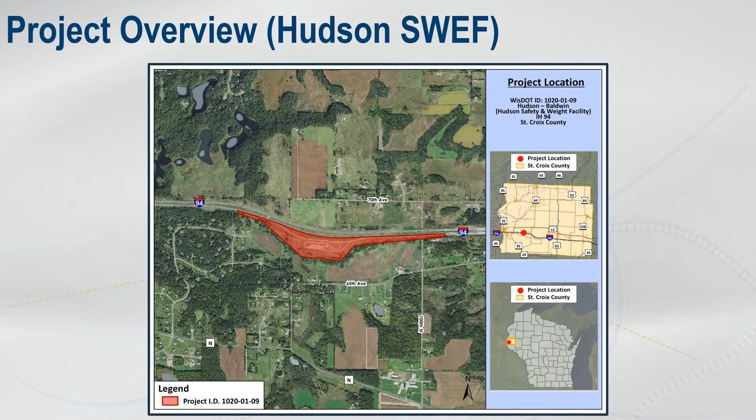The Hudson SWEF project is located between mile markers 7 and 8 along eastbound Interstate 94 in St. Croix County between Hudson and Baldwin. The Menomonie SWEF project is located between mile marker 48 and 49 along westbound Interstate 94 in Dunn County between Menomonie and Eau Claire.

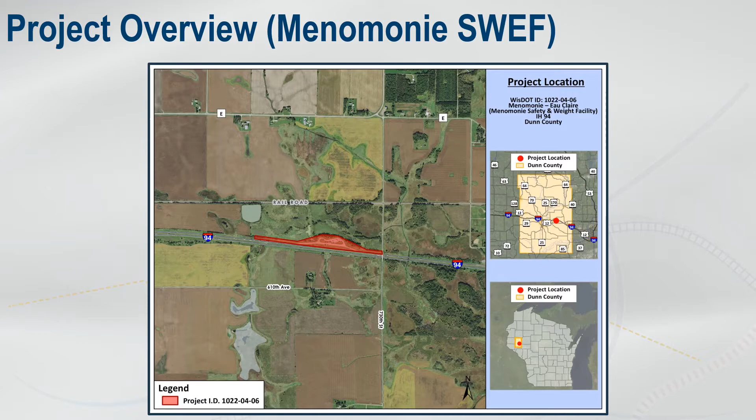The second objective is to confirm both the operator and carrier are complying with necessary laws and regulations. This ranges from checking to see if the vehicles have up-to-date registration and insurance, reviewing operators' logbooks to ensure that they are getting the proper amount of rest, and watching shipments for illegal substances.

Lastly, they monitor the overall weight and weight distribution of vehicles' loads in order to protect the state's roadways and bridges. It is currently estimated that overweight or improperly loaded vehicles cause approximately $35 million in damage each year to Wisconsin roadways, so it is important that the Wisconsin State Patrol be able to continue efforts to reduce the damage to the state's infrastructure. If you are interested in learning more about this important WisDOT program, please take a moment to watch the SWEF inspection video linked to this project's website.

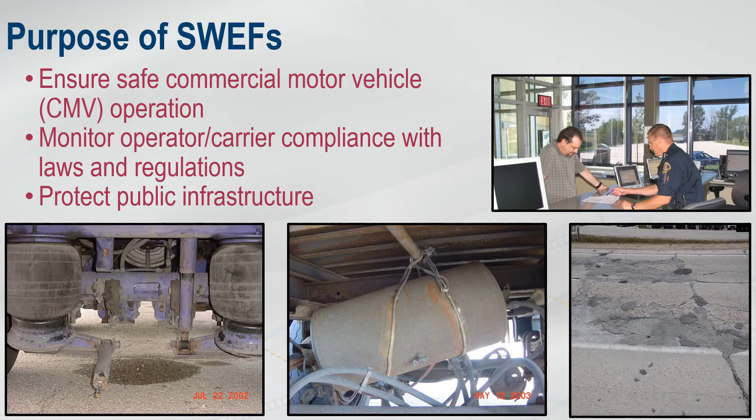The aim of the Hudson SWEF project is to replace the deteriorating facilities and infrastructure. The Hudson SWEF was constructed in 1993 and has reached the end of its useful life. The existing site lacks sufficient storage for inspectors' equipment and has a crowded building in addition to having poor sight lines to the adjacent interstate. The existing facilities equipment, such as site lighting, water well, static scale, and weigh-in-motion system, also is outdated and in need of replacement.

The project will also improve the site efficiency for CMV operations. The current site requires commercial motor vehicles to weave and loop their way through the entire site in order to be inspected before exiting the SWEF and continuing with their trip. The proposed site will allow Wisconsin State Patrol to determine, while the vehicle is on the static scale, whether they will pull the vehicle around into the site for a detailed inspection or allow it to return onto Interstate 94.

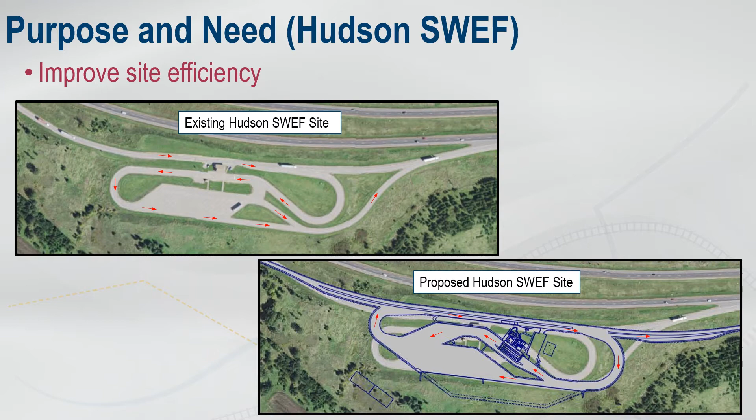In addition, the existing static scale is a single-deck scale, which requires 3 separate weighing operations to determine the overall weight of a commercial motor vehicle. The new static scale will be a triple-deck scale, allowing the Wisconsin State Patrol to weigh a typical truck in one operation, saving time for both the State Patrol and the CMV industry.

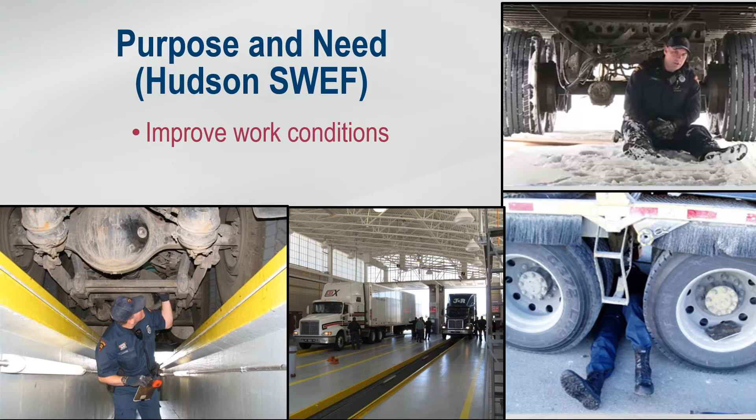The new building will provide dual indoor garage bays where commercial vehicles will be parked to perform a vehicle inspection. The inspection bays also will have underground pits, as can be seen in the left 2 pictures. These conditions will allow for more efficient and safer inspections by giving inspectors better physical and visual access to commercial motor vehicles.

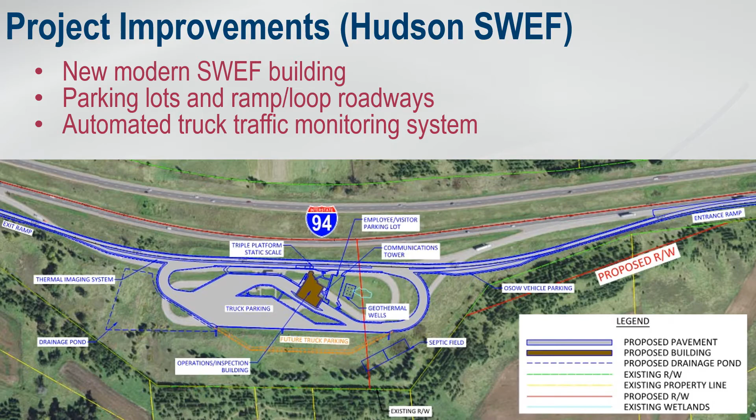The Hudson SWEF improvements will include a completely reconstructed site, including a new modern-day SWEF building, parking lots and ramp/loop roadways, and an automated truck traffic monitoring system along eastbound I-94. The new site layout will also provide additional commercial motor vehicle parking and the option to expand further in the future as the demand for truck parking continues to grow.

The new modern Hudson SWEF building will include spaces for both Wisconsin State Patrol operations and inspections. The operations space will include a location for observing the static scale in the adjacent I-94 roadway, driver contact area with counter, office spaces and conference rooms for troopers and inspectors, various storage functions, and a public lobby with access to public bathrooms. The inspection space will consist of 2 garage bays with underground inspection pits.

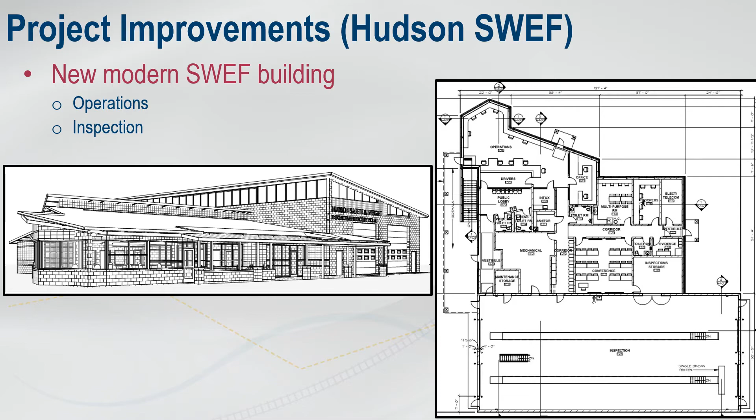The Hudson SWEF project will include an automated truck traffic monitoring system consisting of various roadside cameras along with many sensors and scales embedded in the roadway pavement. The scales will be located along eastbound Interstate 94 as well as the ramp entrance into the SWEF, utilizing weigh-in-motion or WIM technology. This technology allows a commercial motor vehicle to be weighed and combined with a credential screening while the vehicle is in motion in advance of the SWEF.

This system creates an efficiency in helping determine which vehicles warrant a further detailed vehicle inspection and which vehicles are okay to bypass the SWEF, saving both the Wisconsin State Patrol and the CMV driver time and money.

In the event a CMV vehicle along the US 12 bypass route is detected that warrants a further detailed inspection, a remote pull-off site will be constructed and located along Wisconsin 65 south of Roberts for the Wisconsin State Patrol to utilize.

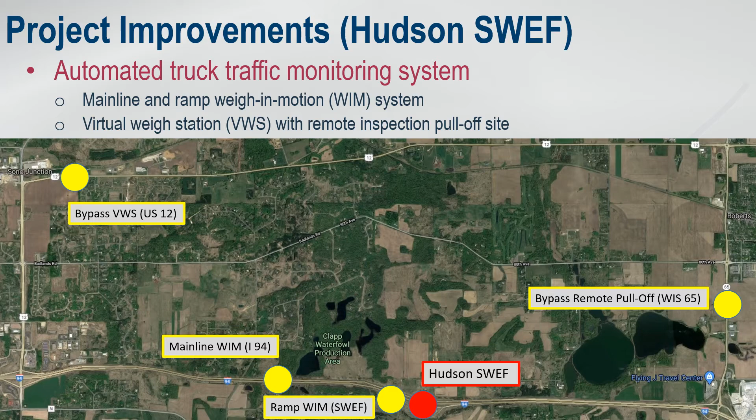Moving on to the Menomonie SWEF project, the first need is to renovate the existing building and increase the storage capacity. The current outdated building, built in 1984, is cramped and does not accommodate the current storage needs required by the inspectors, troopers, and maintenance staff.

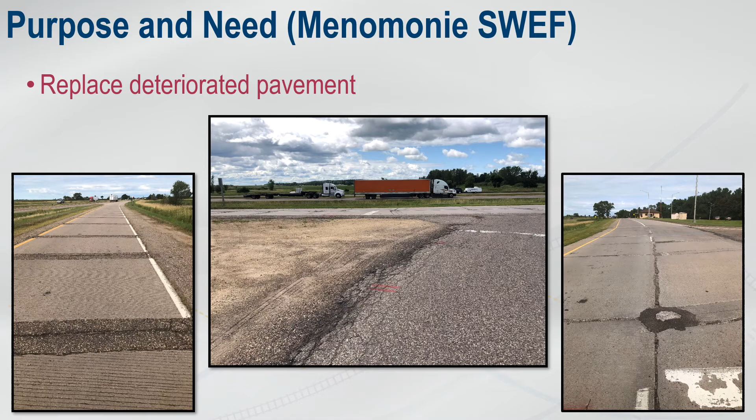The existing pavement on the Menomonie SWEF site is showing extreme wear and tear and has undergone past spot repair and rehab in several locations. As a part of the project, the pavement on the entire site, ramps, and parking lot will be replaced.

Lastly, the Dunn County area has a need for additional road salt storage capacity to safely maintain the Interstate 94 corridor during the winter months, so a storage shed will be built at the Menomonie SWEF.

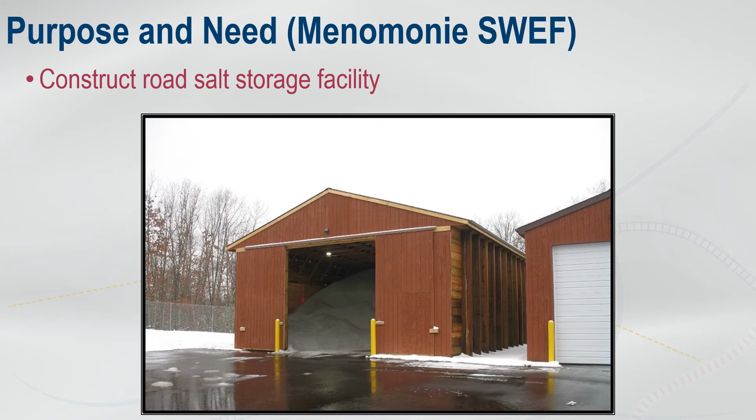The Menomonie SWEF improvements will include renovating the existing SWEF building, adding accessory storage buildings, replacing the pavement in the parking lots and ramp/loop roadways, removing the existing automated truck traffic monitoring system along westbound Interstate 94 and replacing it with a virtual weigh station to monitor commercial motor vehicles approaching the SWEF along westbound Interstate 94.

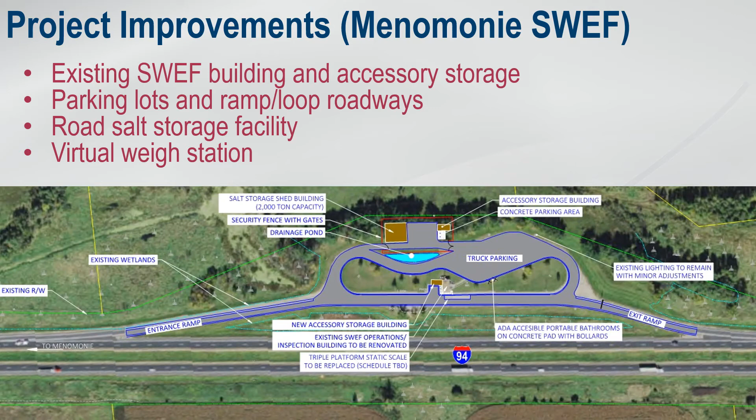The road salt storage facility is planned to be located north of the existing SWEF building and parking lot, which will not impact the existing SWEF site operations and utilize unused space within the existing right-of-way. The road salt storage facility will be surrounded with a gated security fence.

Looking at the project schedule, we completed 30% conceptual plans in March and are progressing towards submitting 60% preliminary plans in October. This is the stage where impacts are identified that are going to occur as a result of the proposed improvements, and then documented and evaluated in the project's environmental document.

Once the environmental document is approved and a right-of-way plat is recorded, real estate acquisitions can begin. Coordination with utilities regarding any potential conflicts and the resulting adjustments or relocations that will be necessary in order to construct the project also will start.

Our final plans and bid documents are scheduled for delivery in February of 2022. Construction of the Hudson SWEF project is expected to start in 2022 and continue through 2023. Finally, the Menomonie SWEF project is expected to be constructed in 2024 once the Hudson SWEF improvements are completed, to prevent both facilities from being out of service at the same time.